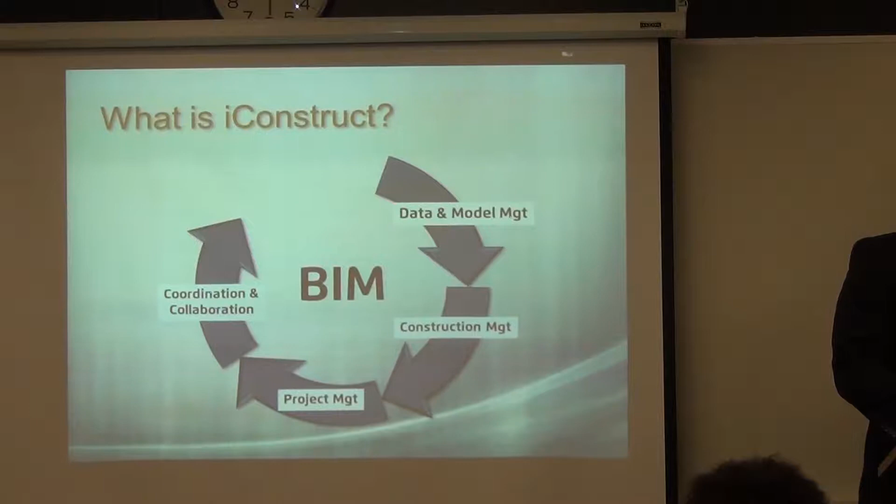So what is iConstruct? You've got the BIM, data model management, construction management, project management, coordination, collaboration, and reporting and communication.

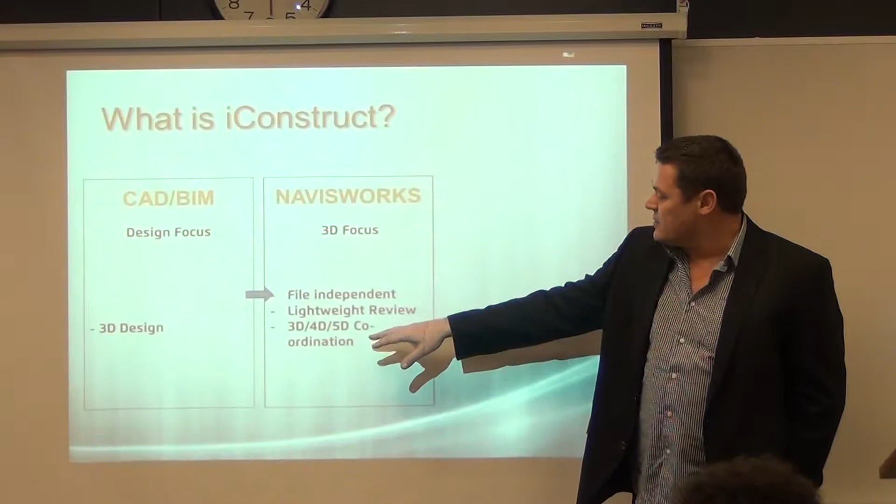So you have your typical CAD stuff, your 3D design. You end up taking that into Navisworks. Now Navisworks is a great tool, but what a lot of people complain about is—it's great to bring in independent files and view all this stuff and do some coordination in it, but you've got so much data inside this model that you can't access. And that's where we come into it.

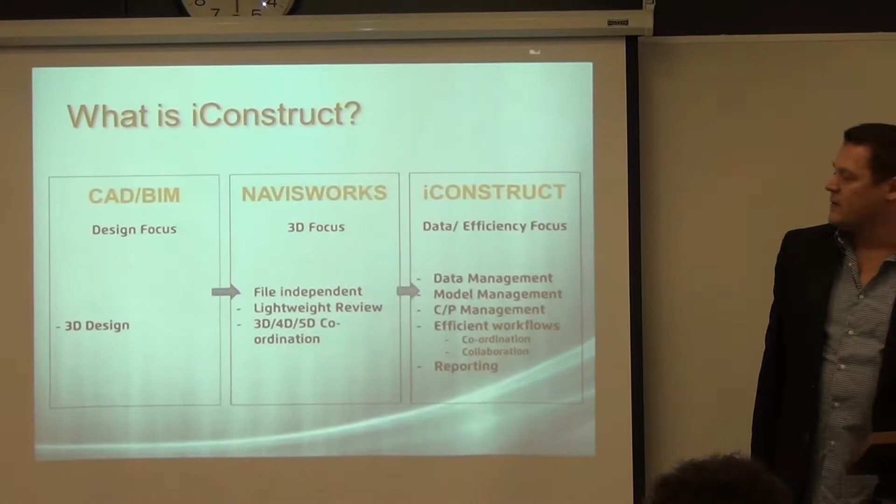With iConstruct, we've got data management, model management. We take your clash detection and put it on steroids, basically. So if anybody's ever used it for clash detection, what I'm about to show you will definitely enhance it.

So what I'm going to do here, and I apologize, this screen is so small right now on mine, so I've got to adjust this thing. And I'm getting old, so I got to put on some glasses.

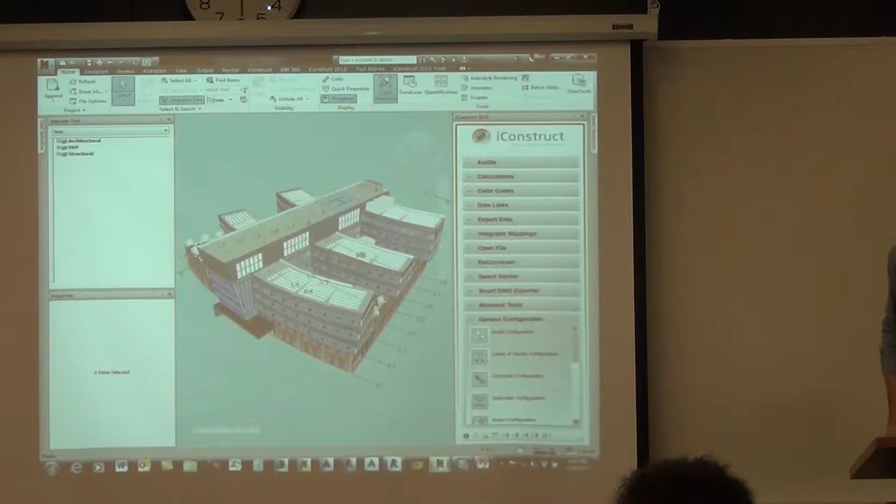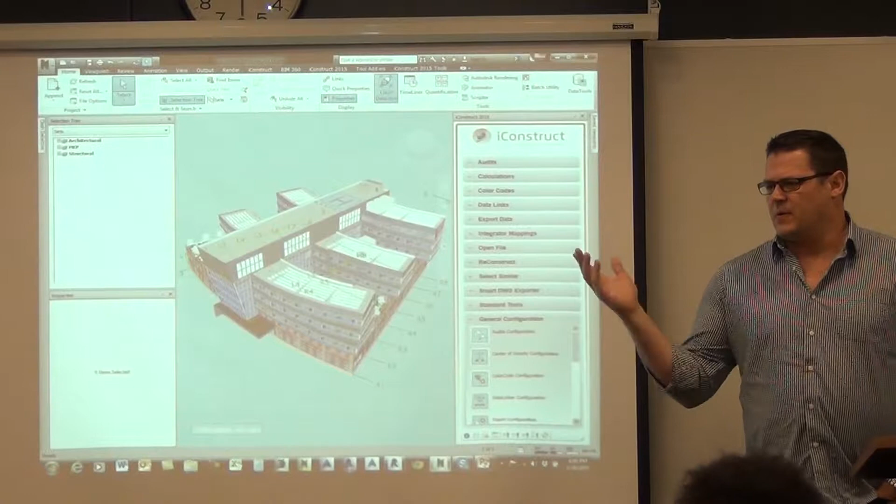All right, so this is Navisworks, and off to the side here, I've got my iConstruct menu. 90% of the people that buy our product, they buy it for clash detection. How many people here are actually using Navisworks? How many are using it for clash detection?

Okay, so like I say, 90% of the people buying it is because of that. So what I'm going to do here is run a quick little test. That's clash detection here—I ran structural versus HVAC. It came up and showed me I've got 432 clashes. That's not a lot, we get clients with tens of thousands of clashes. So that's great, that's all Navisworks, it does a good job of that. But what it doesn't do a great job of is helping you manage those clashes, getting reports out of it, things like that. So that's where we take it over.

So I'm going to come back in here, go to my iConstruct menu, and show you some stuff that just came out last week—you guys are like the first people to ever see this. So I'm going to go to my standard tools, go to Clash Manager, and now my dialog box comes up. It's really huge now.

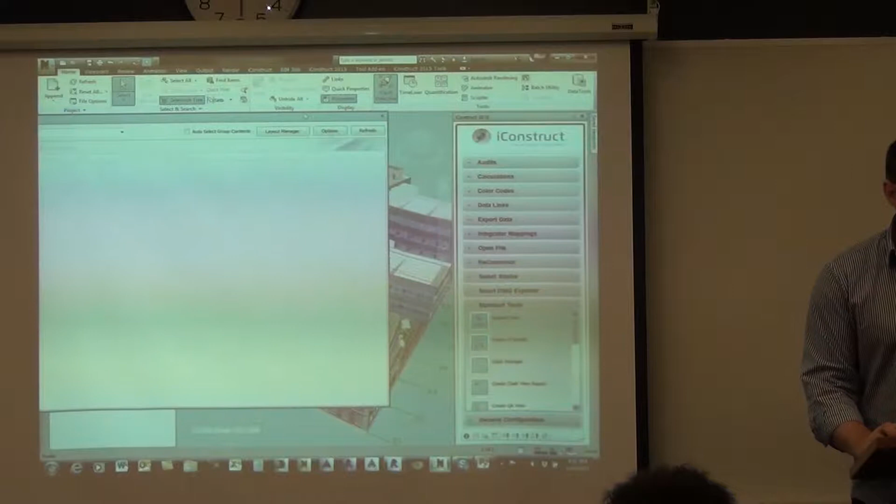The first thing I'm going to do is select the test, structural versus HVAC here. This is going to populate the dialog box with all my clashes. So if I expand this out, you're going to see all my clash names, their status, and if I have any comments.

I have 2 columns here called Clash Instance Count. This is showing me the structural element in this clash is clashing 10 other times, so 11 times in total in the model. The HVAC element in that clash is only 1. So I could actually sort by those if I wanted to, and it's showing me this one's 7.

So I might want to go and sort out the HVAC elements first. We also have severity distance there too if I wanted to sort by that. What I want to look at doing is look at other ways to help me sort or group these.

So if I right click on any column, I can bring up what's called column chooser. This little dialog box comes up here, I'll just stretch it out. So what you're seeing in this dialog box is every single thing right now inside Navisworks that I can use to help me sort or group my clashes.

I want to look at the grid level at all these clashes, which level they're on. So I'm going to take grid level and drop it right there. So now I can see all the levels. This is nice, allows me to see it, but I would rather group them that way.

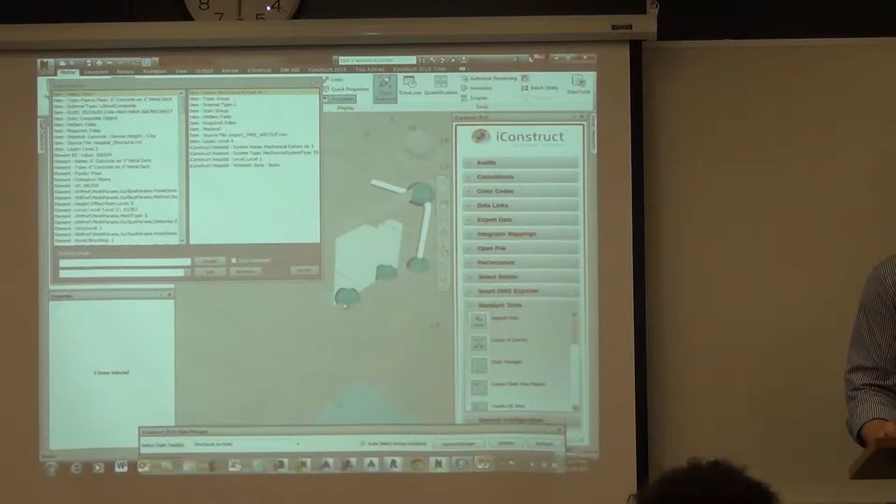So what I could do here is I could say, yep, that one, that one, that one, and that one. I'm going to put it in a group called test group, and I'm going to say auto increment. And so I'm going to go create - they get turned off. I've now created a group and thrown them in there.

Oh, hang on, I missed one here, so all I do is highlight that, grab it from the list, and say add it to that one. And then I can spin around and come over here and say, oh, yep, I'm going to create a group of these over here. Maybe there's somebody else's, so I'll go here, here, just grab a few of them, and I'll just say create, and it automatically, because I have auto increment on, created my group number 2 there.

So now I'm just going to close out of this, bring this back up, my dialog box, and if I minimize that, now you can see I've actually created these 2 extra groups here, test group 1 and test group 2. So like I said, that's just added last week. It's not even in the official release yet, but we do have people that are using it because they love it. So now that I've got that done, I'm going to turn around and pass this back into Navisworks.

Right now this is in iConstruct. So I'm just going to right click on the test here. I can create Excel reports. I can create reports, which I'll show you in a moment. We can also create object viewpoints, test viewpoints, and group viewpoints. So I can create all those right here. We can also renumber these things or rename them.

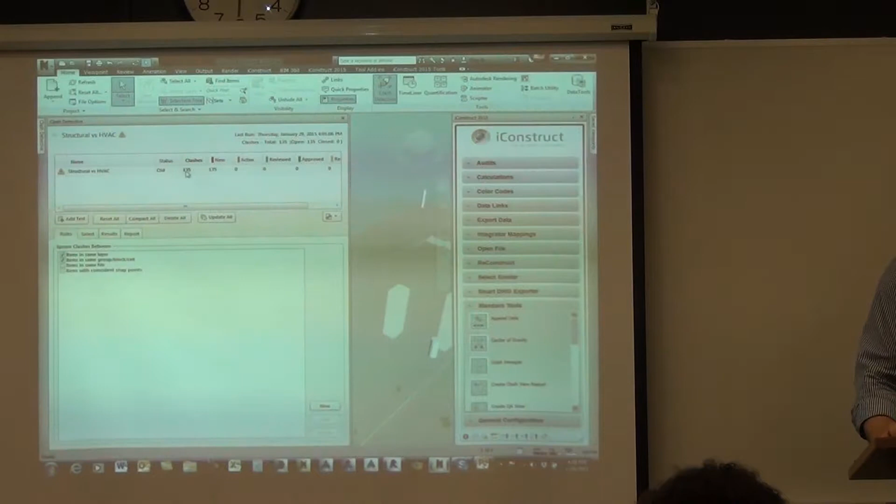What I'm going to do here is go create Clash Detective Group. What this is doing now is passing it back into Navisworks. So before I had 400 and some clashes. If I go back over here now, I'm down to 135 clashes. So if I go to my results, there you can see all the different clashes.

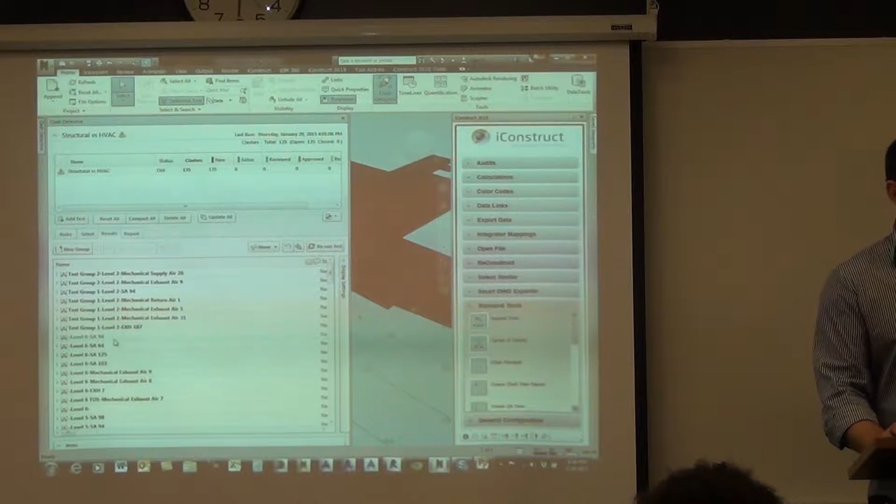So they don't say just clash 1, 2, and 3 anymore - it's actually picking up the name of the groups. So what I'm going to do here is change a few of these statuses just to show you some reports that we can do. So I'm going to go active, reviewed, approved. That's good.

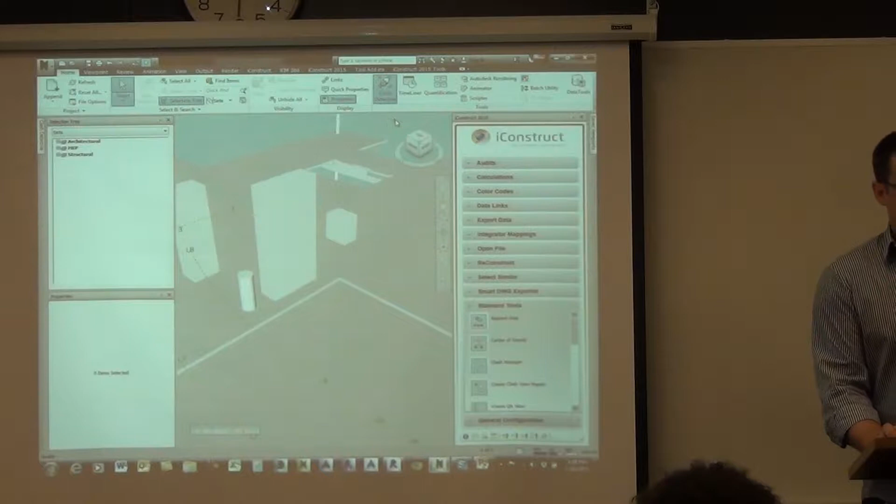All right, so now that I've got that, I want to look at some reports. So I'll expand this out and I'll unhide everything. Come back over here to my standard tools. I'm going to go down here to create Clash View Report. I'm going to expand this out. I'm not going to do them all.

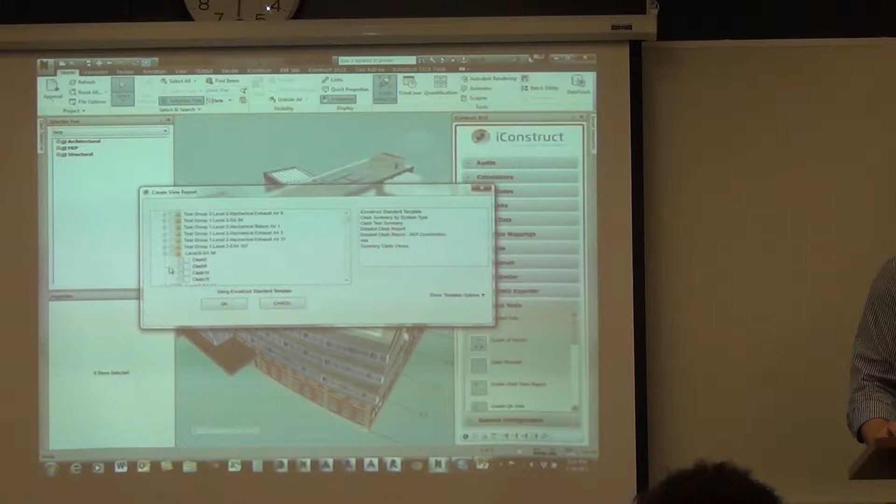There's a lot of them in there. I'll just do this one here. And I'll go Summary Clash Views. So this is going to create a report here. This report is completely customizable. That's one problem people have with Navisworks.

You just get what it gives you. And then they take it into Excel or they do whatever they have to do and they modify it. So in that situation here, I don't know if it looks better on your screen than mine, showing me where the clash is at in elevation, where the clash is at in plan view, and then giving me a detail of the clash itself.

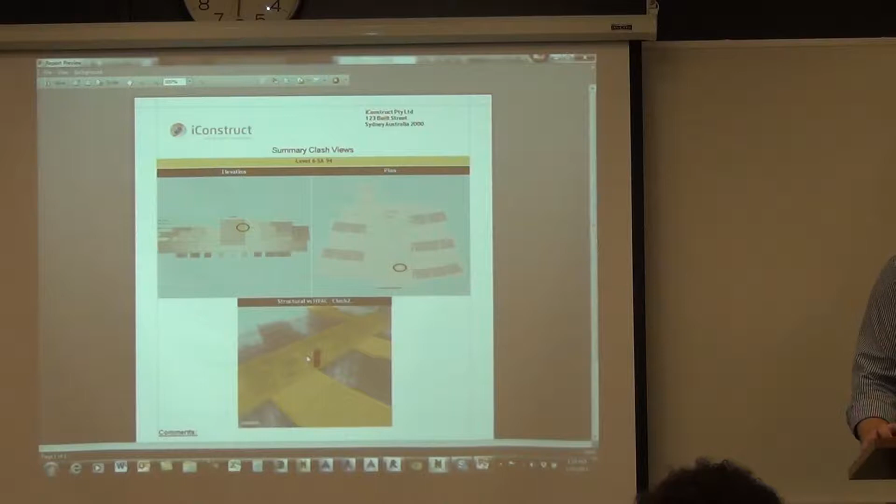We can change any of this stuff. I can take those views off, I can have more views on there, I can make this zoomed in farther, I can put all sorts of text on the side, whatever. We've got our own report engine built into it. It's kind of like Crystal Reports.

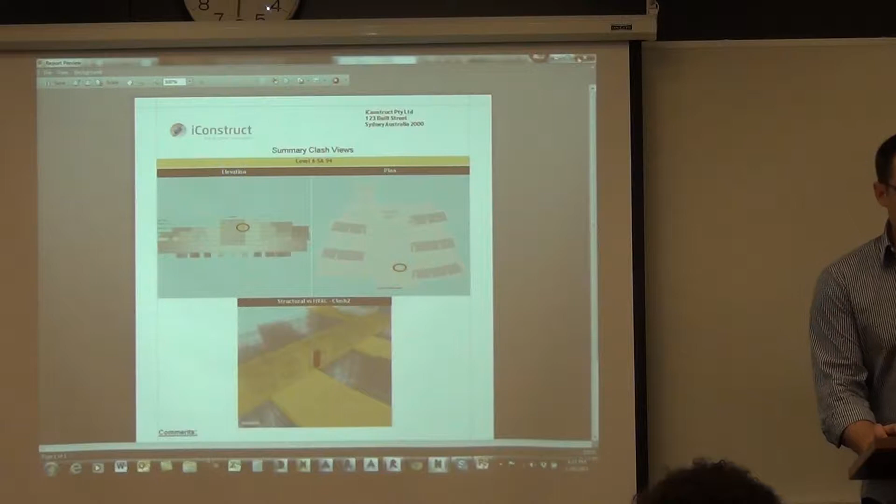So that's one report. I'm going to do another one here. And we'll just grab a few things here.

And I'll go Clash Test Summary. So this is going to show you a pie chart. Now this is really popular at the moment, not so much in this form. This is just showing me how many active or new clashes and stuff like that.

But we've got clients using it to say, show me all clashes over 2 weeks old, show me clashes between 2 weeks and current, and show me all the current clashes. Then they go into a meeting and say, look, we've got 500 clashes over 2 weeks old. And then they bring out the next report: out of those 500, MEP you own 375 of these, structural you own this many. So they can break it down.

We can do bar charts, line charts. We've got a client, actually not far from here, in St. Louis, that's using line charts to show structural versus HVAC, and map that as the job goes on, week by week, just so they can see that line, whether it's dropping or not. So that's the clash detection - like I say, the #1 reason why people are buying this product by far. It's just enhancing what they can currently do with Navisworks.

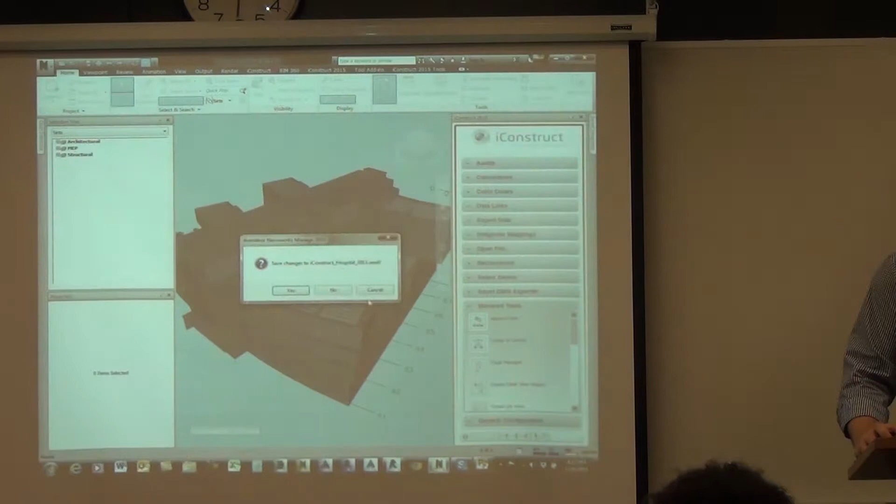So what I'm going to do now is jump into what is called Reconstruct. I'm going to open up a different model here. Often you get files from different sources - you might only be working in Revit, but you're getting files from Tekla or PDMS or whatever it is, and they come in different formats. They look different than your current file, so they're kind of hard to navigate through.

This one is a Tekla file. So you can see here it says not in use, undefined, undefined, undefined. And then you've got truss, and it highlights everything. It's a really difficult file to navigate through. If I expand out truss, then under that I've got angle, and then it says body - what the heck is body? And then you've got to come down here and find out what it is and all that.

So what we have is what's called Reconstruct. I can reconstruct this file - I'm going to reconstruct this Tekla file. I'm just going to give it a name and go save. So what this is doing is exporting this out.

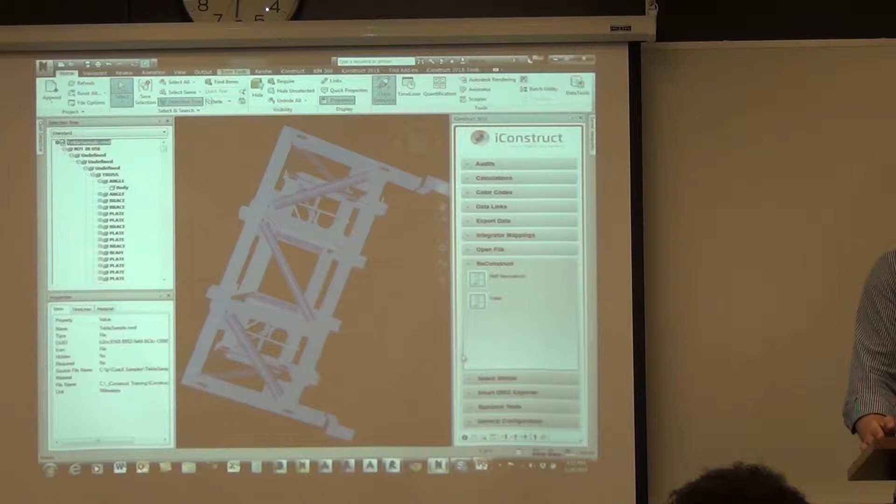It's exporting it out and creating a brand new NWD file. Now, the reason I'm doing it is I want to restructure the tree, but there are other reasons people do it. You might get a large, massive file and want to send it out to you guys in the field, but it's too big to put on an iPad or whatever. So what they do is select certain things and export that out using the Reconstruct tool.

Autodesk is actually one of our clients - they've purchased copies of this to clean up models to go up into Autodesk 360 and stuff like 360 Glue, things like that. So I'm going to open up this file now.

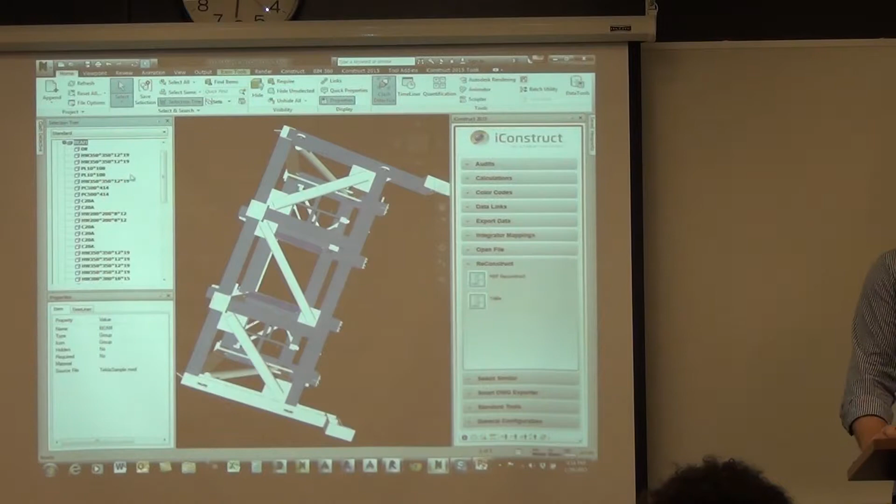Now remember this file format here. If I go over here and open this file, there it is, one I just created, 129. If I open it, the file doesn't look any different. But if I expand this out now, that's the exact same file - all I did was regroup it, saying put all the beams together, put all those braces together, all the plates and the posts. I not only grouped them together, but if I expand it out, I actually gave them a name. Before it just said body, which meant nothing to me.

Now, this still doesn't mean anything to me - I'm not a structural guy - but somebody might be able to look at that now and say, yep, okay, I know what that part is. Otherwise, you're constantly having to go down into these other tabs. All I did was restructure it based off of this tab here - I said group everything by the beam and then give it a name based off of the description.

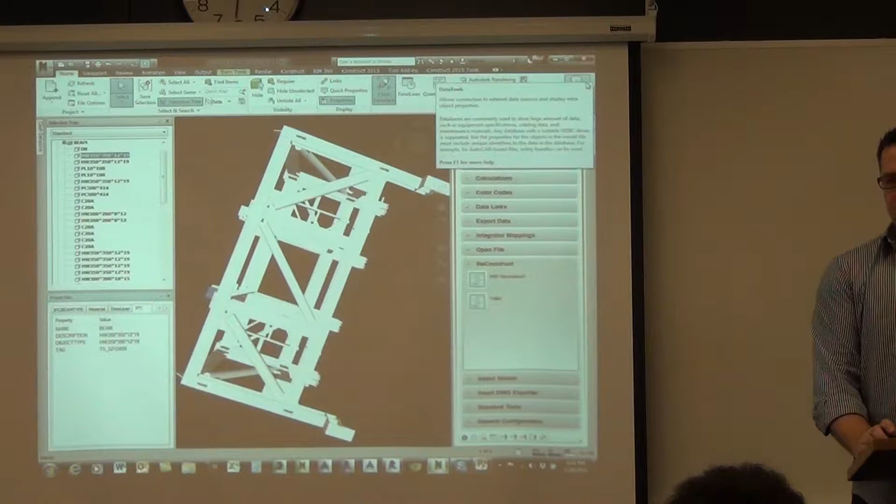But there's other things people use it for. If you get a file like from AutoCAD or something, and it says it's like a pump, and under that it's got solid, line, all this stuff, I can merge all those together into one part. Right now they're broken up into all sorts of different parts.

Okay, next thing I'm going to show you is our Integrator. Reconstruct, not a real sexy tool. Integrator, not either, but they're very integral parts in the product. So if I select this system here at the moment, so that's a system, and it's SA4. Right now I only have two tabs here, Item and Timeliner.

Now if I wanted to go in and do my clash detection right now, I actually want to clash the system itself, not each individual part. I just want to find out, is that system clashing with structural? Right now it would be very difficult to do because there's no information at the system level. If I go down to each individual part, yes, I have that information there, but there's so many tabs down here. Anybody using Navisworks, you see this, often they go to this tab to get some information, then they jump over to another tab.

So what we can do is, what's called Integrator, we can actually create a user-defined tab. I just clicked on my integrator here called HVAC. It says one group and 62 items have been mapped. You look at this right here, it says Item and Timeliner. Once I go OK, you got a new tab now called iConstruct Hospital. We just called it that, you can call it whatever you want. But iConstruct now, if I go to that tab, now I've got the system name, the system type, the level, and the work set at the system level.

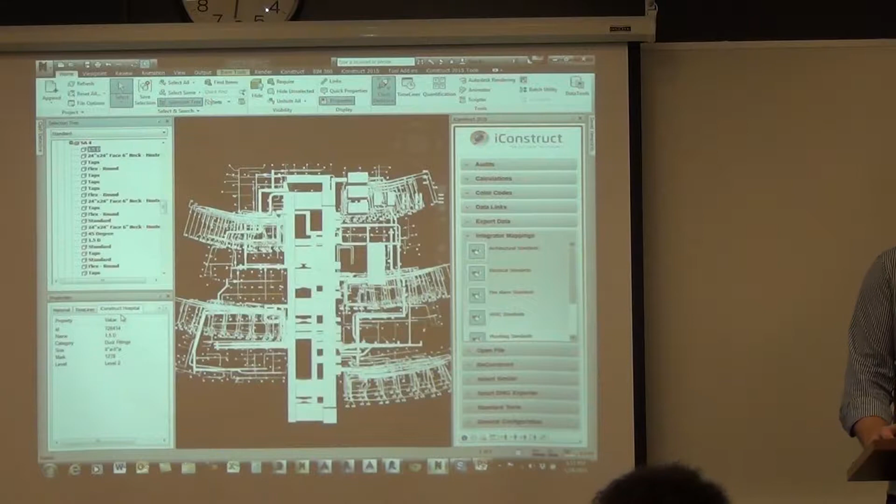Now there's a lot of reasons why you do that. One, it's a lot easier now. I only have to go to one tab to find all the information I need. I can publish this file, send it off to the owner, and I can eliminate all those other tabs and only export out the one tab. So the owner only has to worry about one thing there.

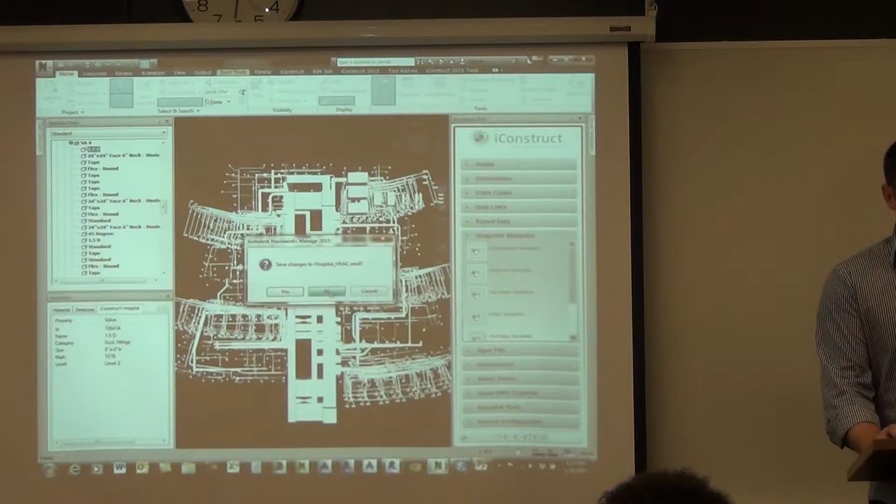But the other big thing, and this is if you're getting into, anybody work with COBie data in here? Not many, huh? So this is just an example anyway, but if I go in here to say some lighting, here's some lights. If I click on one of my lights here, you can see I've got an iConstruct hospital tab, and I got an ID, a name, and a category.

Now what I want to do is attach a database to this. Now you can attach a database inside Navisworks, but it's a live thing that's going on. It goes pretty slow for some clients when they're doing this. What I'm going to do though is take this database, so here I'm going to go data link. I'm just going to attach this database. This is just an Excel spreadsheet. It can be an Access database, it can be a SQL server, whatever.

What I'm doing is looking at a column in that database, and if it matches a property in my model, it's going to attach it. So 1,269 entities have been attached.

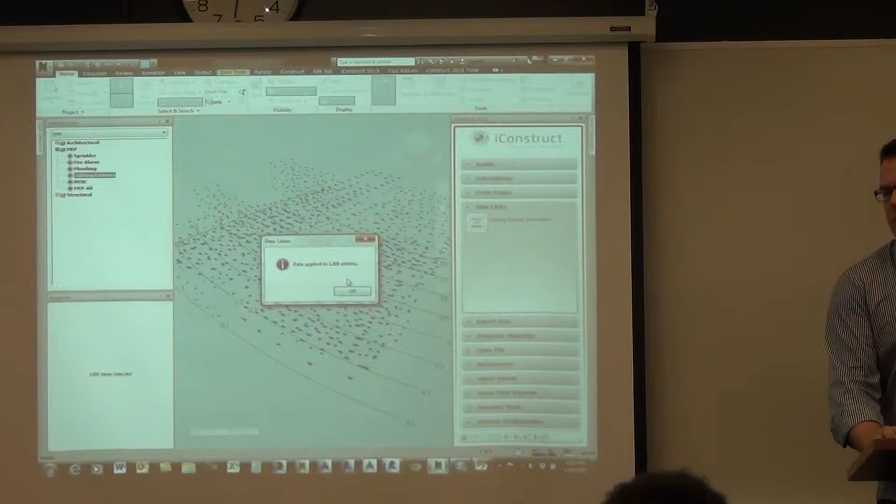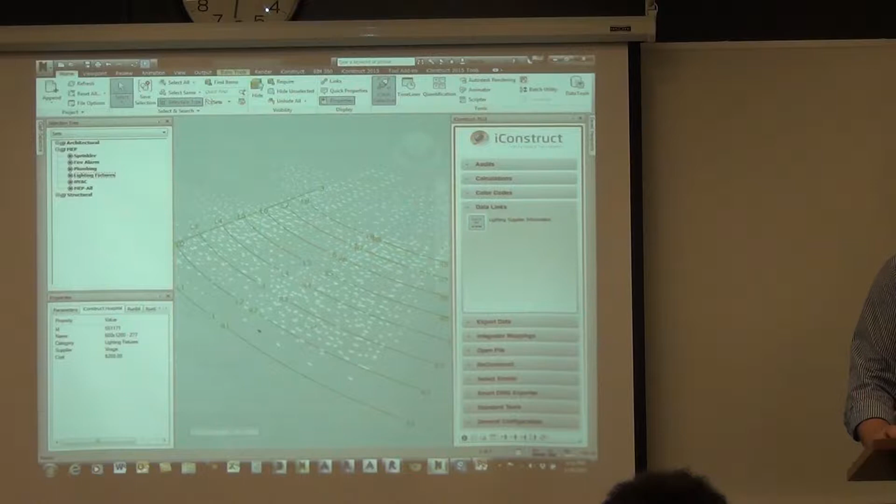Now if I select one of these lights, you'll now see I've got a supplier and a cost. So I physically wrote that data from the database back into my model. So if you're using things like COBie data, or just even writing a work set, say you got work set information, I want to write that back into the model so I can use it for timeliner and stuff like that. That's exactly what we're doing here. That's physically in the model now. So if you open this up in Freedom, you're going to see all this data. So that's the data linking.

Our next thing, I'm going to unhide all, is color coding.

So I've got some structural steel here, and I'm just going to run this color coding. What this is going to do is, same thing like data linking, it's going to look at a database, look at certain properties in that database, and then turn around and recolor my model here.

So there you can see everything that's in red hasn't even been fabricated yet. Orange is fabricated and shipped, and so on. It's just looking at a database, Excel, whatever it is.

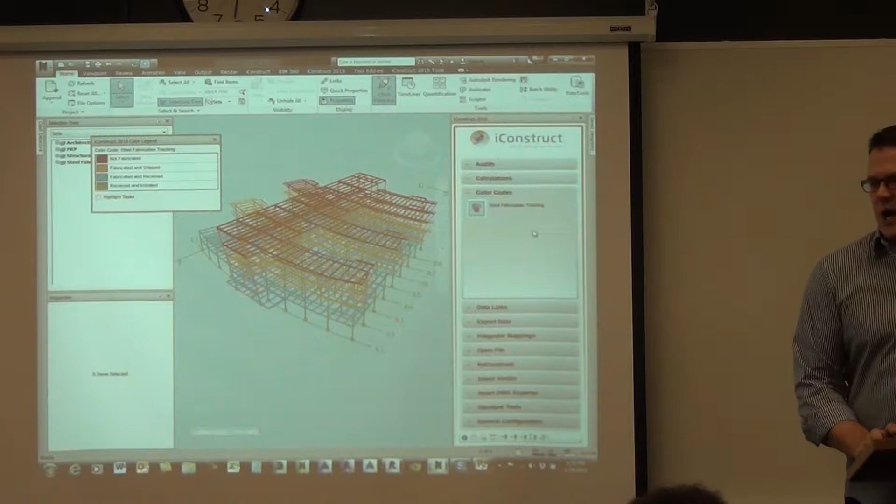We've got clients using this, GCs that say, oh, we've got to place an order for all of our doors on our job, okay we've got 1,000 doors, and they want to make sure they make the order correct. So they'll say, let's color all of our walls in the model based on a fire rating, and let's color all of our doors based on a fire rating. Then they can instantly say, hang on, there's a red wall with a yellow door in there, so they can catch that before they place the order on all these doors. That's another example of why you would use it.

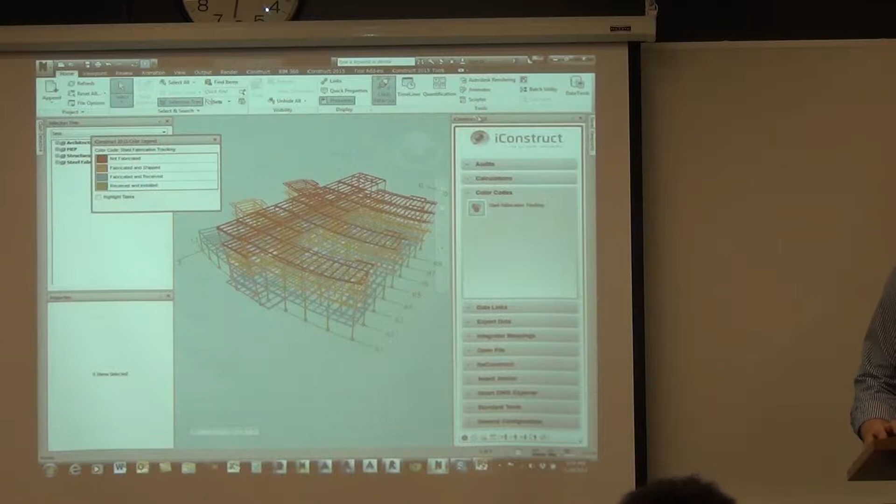There's a lot of tools in here.

Next thing I'm going to show you here is audits. So I want to audit my model. I've got a bunch of HVAC here, and I'm just going to select a bunch of stuff.

I'm going to come up here to audits, and what I'm going to do is say I want to isolate all the system names. So I'll click on this, and what it's doing is grabbing all those parts I selected, and if it finds a certain property that matches another property in some other part, it's going to create a viewpoint of all those parts. This is going to take a few seconds, but you'll see why in a moment.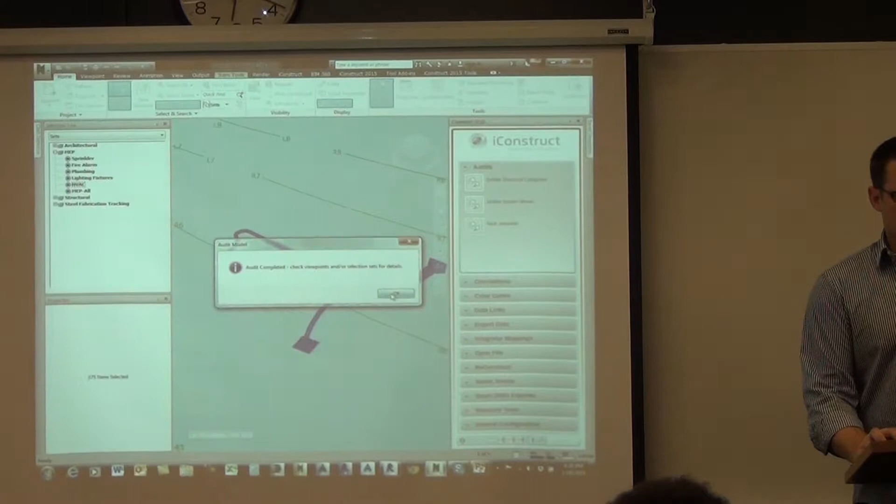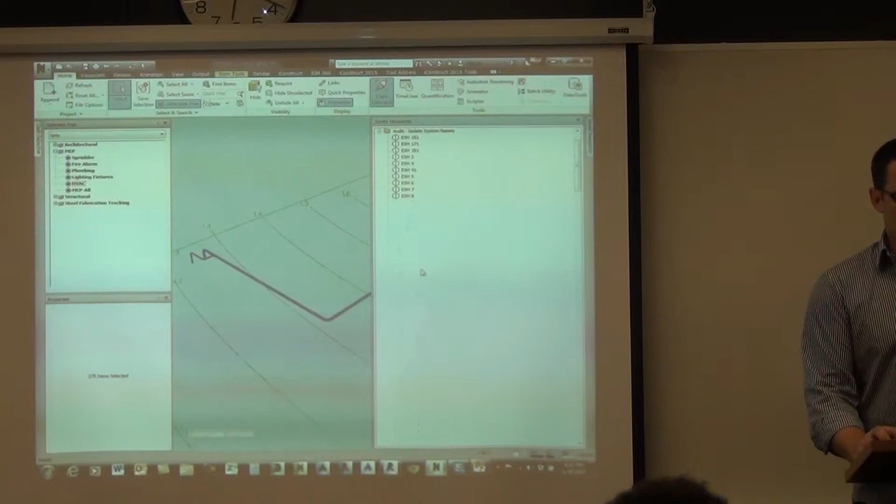So there's my one viewpoint. If I come over here to saved viewpoints, and go under audit, you can see all the different viewpoints that I've created. Some have only got one part in it, and you can see there's a lot of viewpoints.

If I come down here, I'm going to grab this one. So I can see this part here, this system is missing a couple elbows. Let me slide that over a little bit. So it's missing some elbows there.

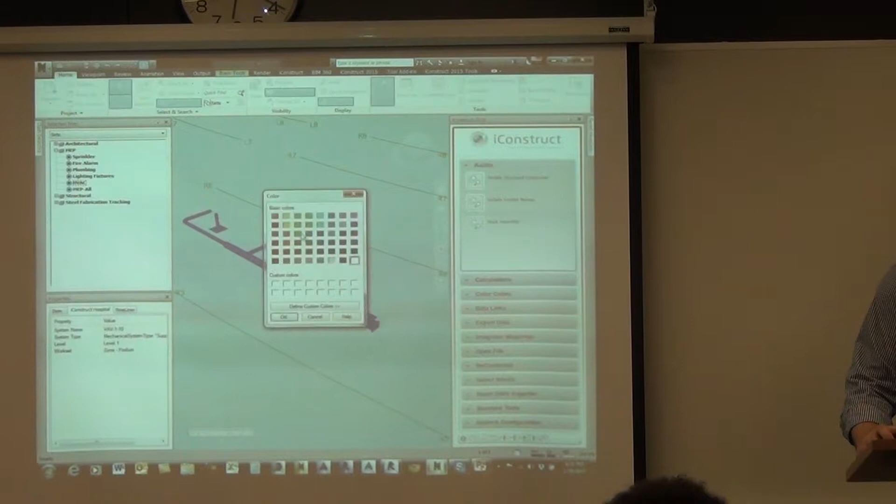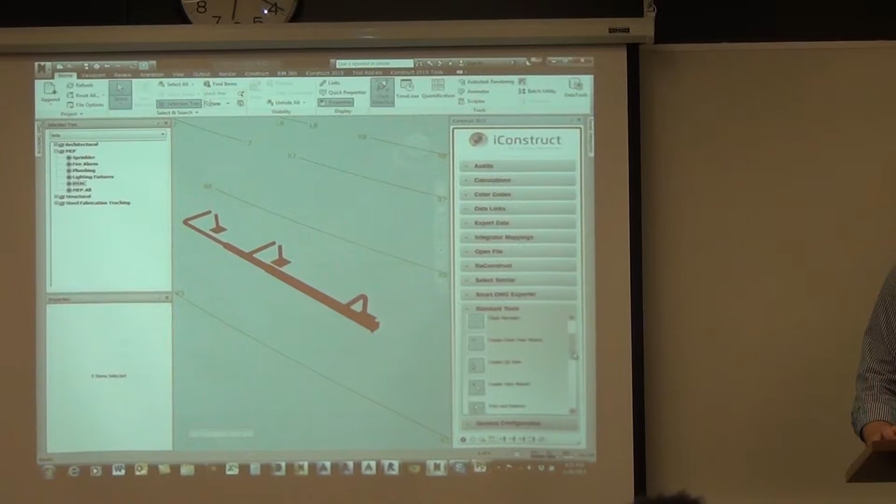So what I want to do is get a report out of this. I'm just going to quickly change the color of this. Okay, so I've changed the color, now I want to do a report. I've come back down to my standard tools, and I'm going to go create view report. It's not a clash view, it's just a view, any kind of view you have. I'm going to find this one I have, 110, where I changed the color.

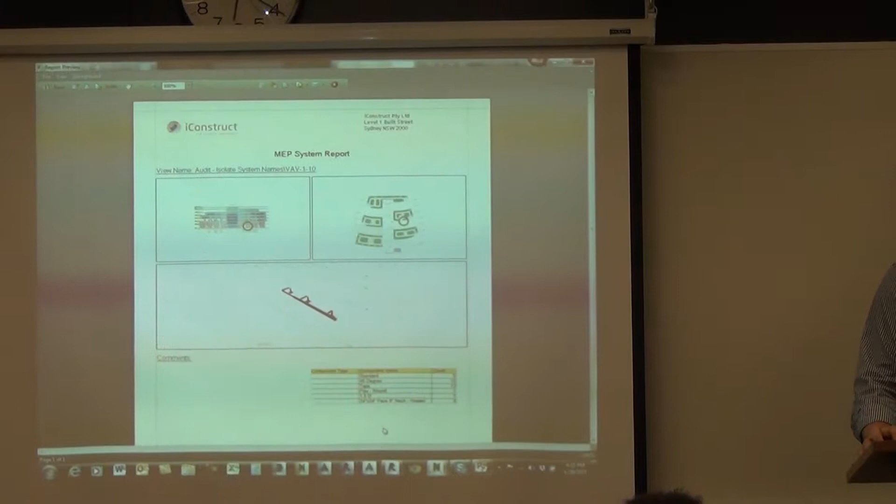And I'm going to select MEP System Report. This is going to be a report similar to a clash view report, so you can still see where the clash is at in elevation, where it's at in plan view, but also it's going to give me a detail of the system, and then quantities of whatever makes up that system. So if I had pipes in there, I can get pipe lengths. It's all based off of the view, we read all the data that's actually inside that view, and we can get that information.

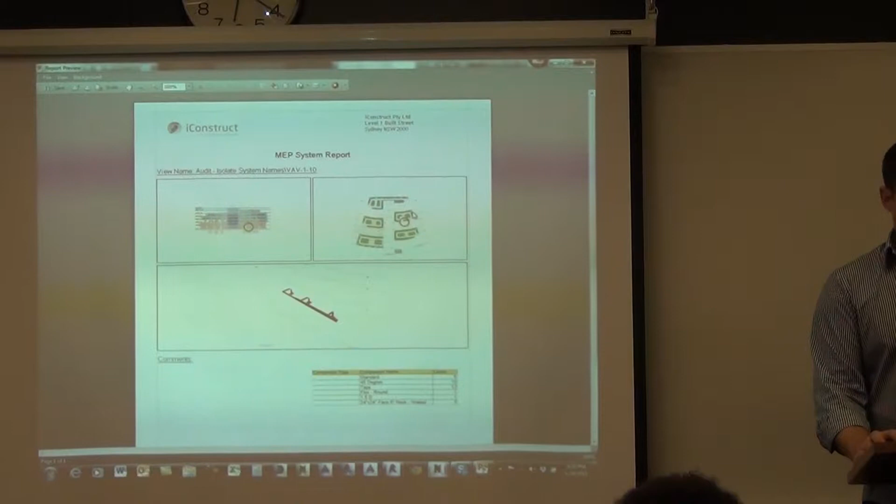We've recently got a very large electrical contractor here in the U.S. that's purchased this, and we did some modifications for them to be able to show side view and top view for like an assembly, if you're going to send it off to manufacturing, so they can get all the parts in. We've actually just added a way to dimension it in here inside Navisworks, so they can basically generate these reports and send it off to be constructed.

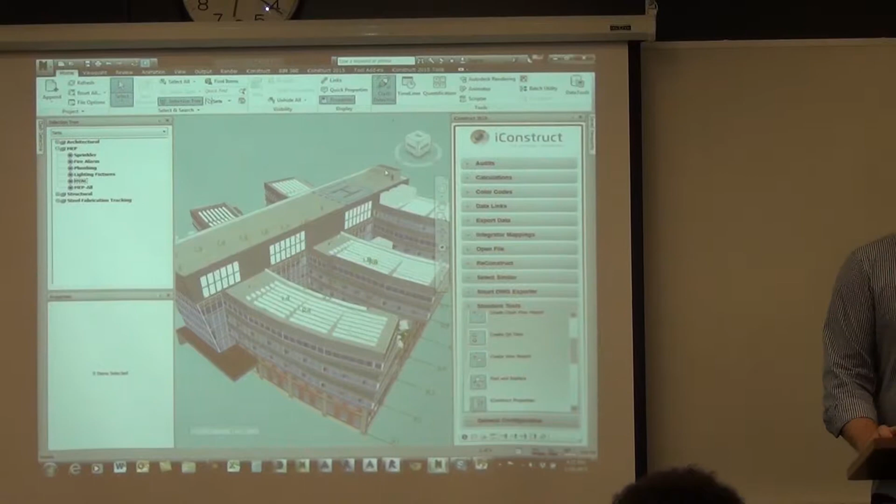Okay, the next thing we've got in here is exporting some data. So I'm going to just hide some stuff here, a whole bunch of doors. I'm just going to go up here to export data, and I've got one set up called door schedule report.

So I export this out, it's just going to create a PDF file for me. But right there you can see what it's done is broken down by the level, the type of door, the family, and then how many on each floor.

We have clients that are buying this strictly just for this, just being able to say, okay, I've got a bunch of duct, I want to know how much, what's the length of 6-inch duct that I have, how many 6-inch elbows do I have, and so on. Just basically taking Navisworks, grabbing anything on screen and hitting the button, and it'll generate your report.

Okay, like I say, this is customizable. This is only, and I'm going to show you what you would get actually out of the box.

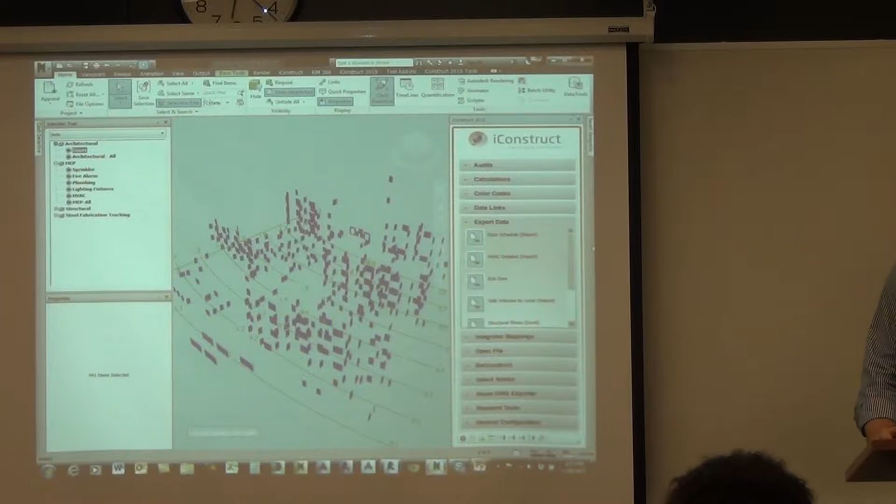A couple other things we've recently added in the past year or so, and as far as we know we're the only ones out there that can really do it: we can now create a DWG out of Navisworks. So we can export anything inside Navisworks, whether it came from Tekla or any other product, and turn around and export that out as a DWG so you can take it into other software. Also, the hottest thing right now other than our clash detection is the IFC exporter. Everybody for some reason wants an IFC file, so we can now take anything out of Navisworks and export it as an IFC.

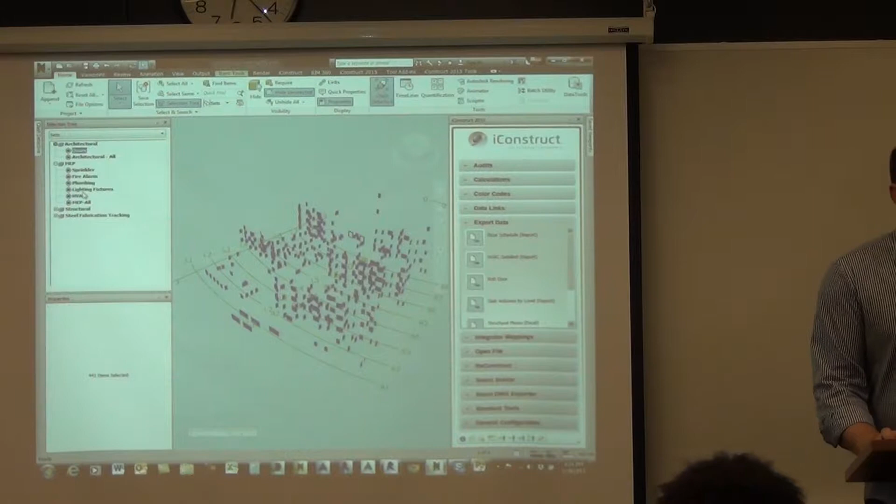So if I just come down here, I'm going to show you what we've actually done. Let's turn on a couple things in here. First of all, I'm going to show you the DWG.

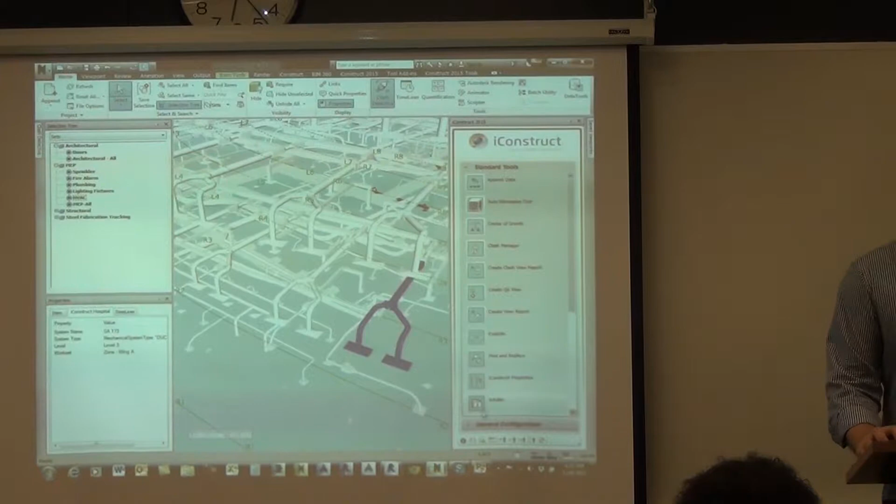We can take any part - I'm not going to export it out, I'll just show you here. I can select the part, and come down to General Configuration. This is where you set things up. Let me quickly clear my profile - this is what you get out of the box. Anybody who buys iConstruct only gets standard tools and General Configuration. So often people think they got ripped off after watching my demo, like where's all that other stuff you showed me? It's right under here, General Configuration, because all that other stuff I was using was unique to my data set or my company, and you might want to change it to be unique to yours.

So for instance, I'm going to create a DWG export. I'll come down here to Smart DWG and give this a name - I'll call it DWG Export. I can choose whether I'm exporting out a mesh or a solid, so I'll say let's do a solid, and whether it's imperial or metric - imperial. Then down here at the bottom, do you want to keep the data or only the user data? If I say keep data, that's everything inside Navisworks, a lot of information. Keep user data is my unique tab that I created - I only threw on the stuff I wanted, that's all I want to export also. So I'll say keep user data, and I can say keep groups, and specify a layer too.

I'm just going to save here and go close. Now you see here we've got Smart DWG. I missed something I didn't tell you about - one thing here, I didn't want that one, I always do that too, it goes so quick. I'm going to load this. I don't want to export out everything that's visible on the screen, I only want to export the stuff I've selected - that's all I want to do. So I'll hit save, yes, and close. Now there's my Smart DWG, and I'll go up here and go DWG Export. It's going to ask me where I want to put it, I'll go save, and it's going to export this out.

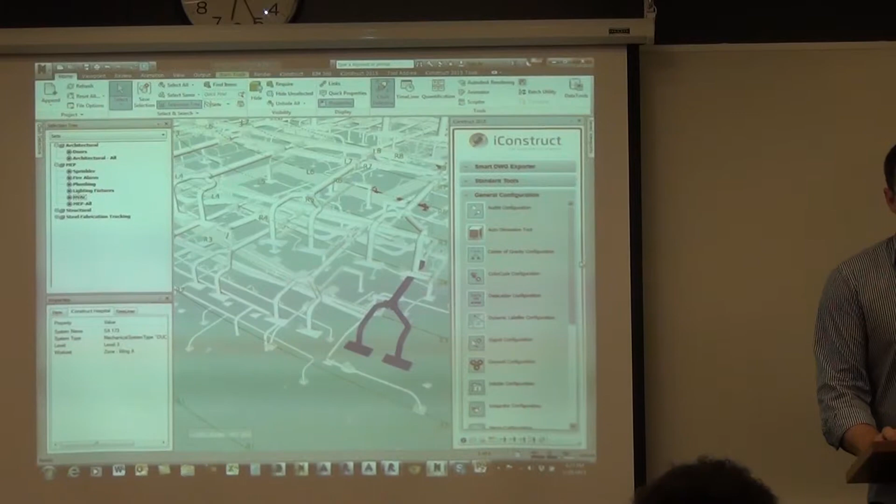So the last one I want to show you in regards to exporting is our Smart IFC. This is huge at the moment - I don't know why, but everybody's starting to want IFC files. Basically, I just create a new file here. Let's go here - and actually, this probably... there it goes. So I gave it a new one, what I could do is refresh this.

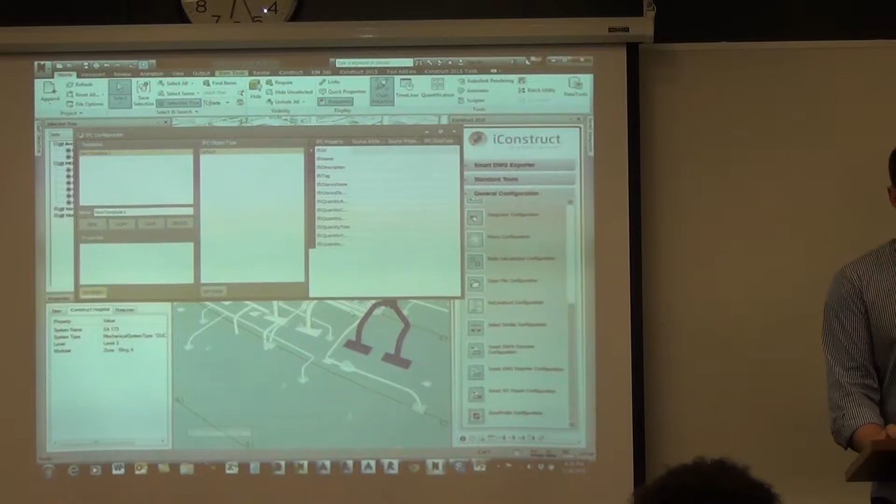Okay, so basically I can take any of the properties. I have the iConstruct Hospital tab, and I want to take all those properties across with the IFC file, so I can just drag those into there. That's going to take across all the iConstruct Hospital stuff. The link here actually represents the IFC quantity link, or whatever it is, so we can drag and drop any of that stuff.

Last thing here is the options. We've got all the property, all the IFC components - we built the whole schema into the model. So if you're going to export out a pipe, here's a pipe - you can set up a selection set or search set and say this means it's a pipe, or an elbow, or a pipe fitting, or a pipe segment - rigid or flexible. You just map them to this thing, use a search set, and it automatically exports out as an IFC file.

I just hit save here, and when I get out of this dialog box, now I've got Smart IFC. That one isn't officially released yet - we had to buy some third-party component to help us get where we wanted to go, so we're just working out the contract with them. But we've got clients using it, we're just not officially selling it yet.

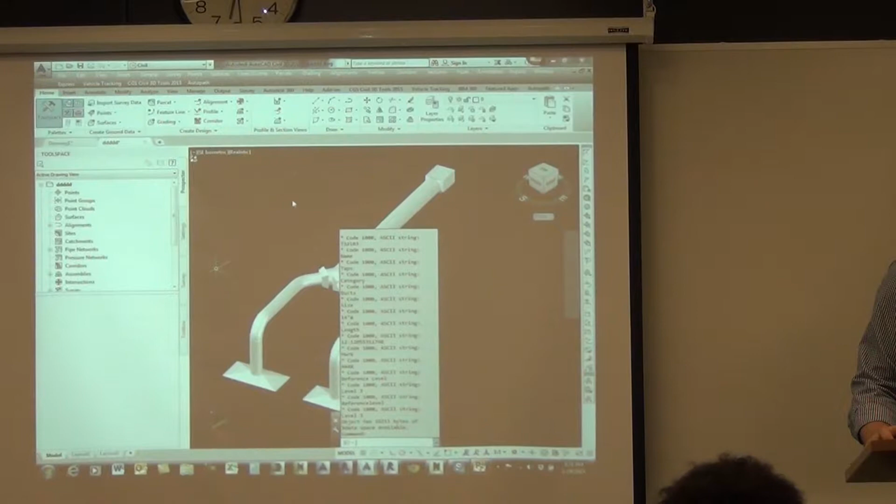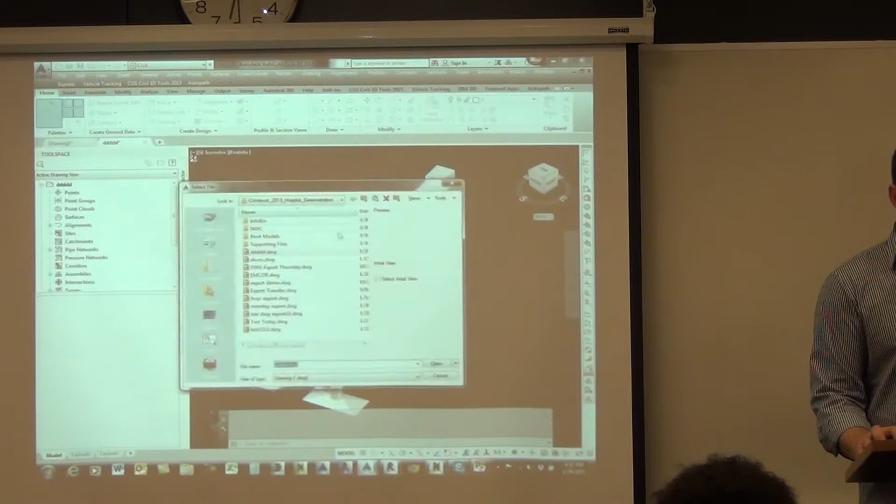Okay, and can I take a look at the layering? I didn't actually layer that one - I mean, is it all in one layer? It is, but you don't have to have it in one layer, I just exported it out. It's probably all as layer 0 probably, yeah, but I have the ability - I probably have another one there that I exported out. Let's see if this one has got one that I've done. It doesn't look like it.

But inside, back into here, all I needed to do was say, let me just change this - okay. And so I want to actually call it maybe the name on there. So if I come back down to their Smart DWG, and I'm going to say what I want to use here is iConstruct Hospital, and I want to use the name on that. What will happen is every time it finds that, it's going to create a layer for that, or I could use some other property if I wanted to. Very good, yeah, great, there you go, close.

Robert, can you talk about the sphere going back into Revit? So it'll be through IFC - basically we bring it in, and then it'll be an entity that you can export out as an IFC and go straight into Revit. And the IFC properties all go - it takes all that information with it.

Will it come in with the different colors based on the new clash, the existing clash? It doesn't, but my guys are that good - they literally wrote that overnight. We had one client that says they want to buy it, but we still kind of go around and do this - we threw it together real quick. He came back to us and added the add and remove, because he's saying, you know, I'm calling the darn thing group, and it keeps adding it all to the same one.

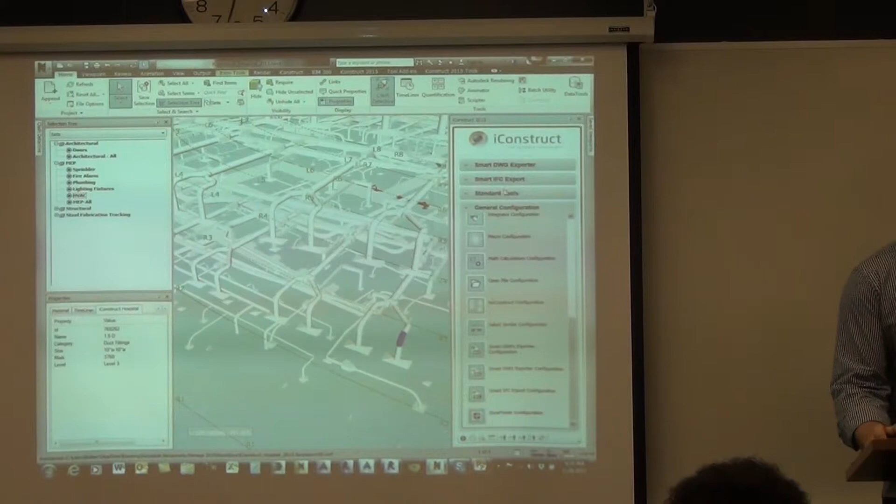So questions, I've got other stuff to show you after this, but questions, anything on what I've shown? Other things I can't really show you because it's so new and I'm not very good at it. This one, you guys can't even hardly read that.

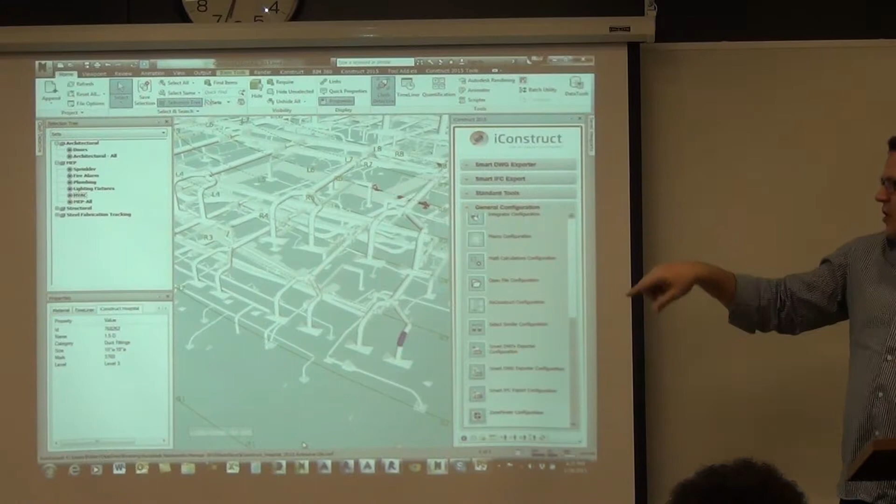Zone Finder. So we got a Zone Finder configuration in there. What that does is basically you can set up zones. You could take an AutoCAD polyline or an AutoCAD drawing, and we can take that data in here and set them up as zones, so you might say that's zone 1, 2, 3, 4. Then we attach that zone information to every single part that falls inside that, so you can use that for TimeLiner and stuff like that. It's basically taking an AutoCAD entity, or we could draw it around there, and giving it a name, might be a work set or something like that. Then we attach a new property to every entity that lies inside that. If it lies within two ranges, it attaches a property for both ranges, so it says hey, this pipe, the majority of it's in zone 1, but part of it's in zone 2, so a new property is added, a partial property, zone 2. Okay, so that's Zone Finder.

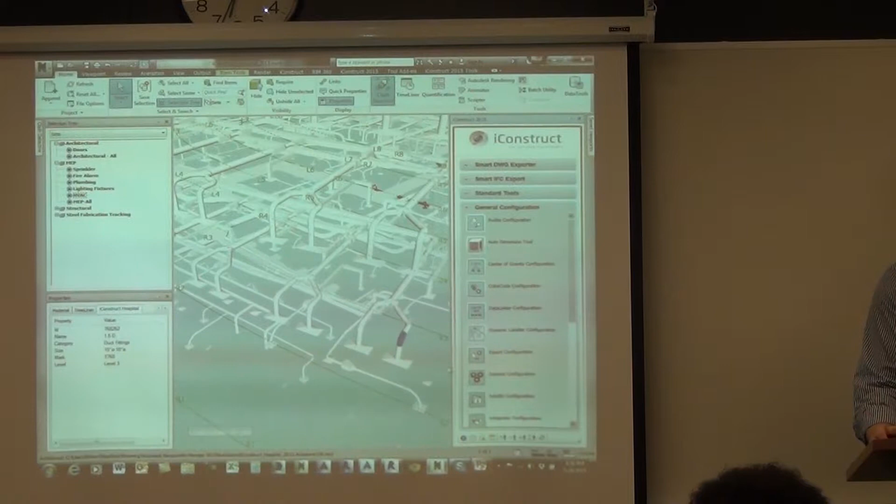We have ways to be able to label things. Like I said, we've got this new auto dimension thing coming out too, it's not really auto, I don't like the word auto in there. You pick two places where you want the dimension to go. The benefit of that, why we've done it for this electrical contractor, is it creates an external file with the dimensions. So we go in there and dimension it up, and then you basically get rid of the dimensions, but there's a file there. So then when you create your viewports or viewpoints and generate your reports, the dimensions come into the reports, because it's looking at an external file, and it will automatically draw those dimensions in your report.

All right, so questions on anything like that? I've got other stuff to show you after this on something else, but yeah.

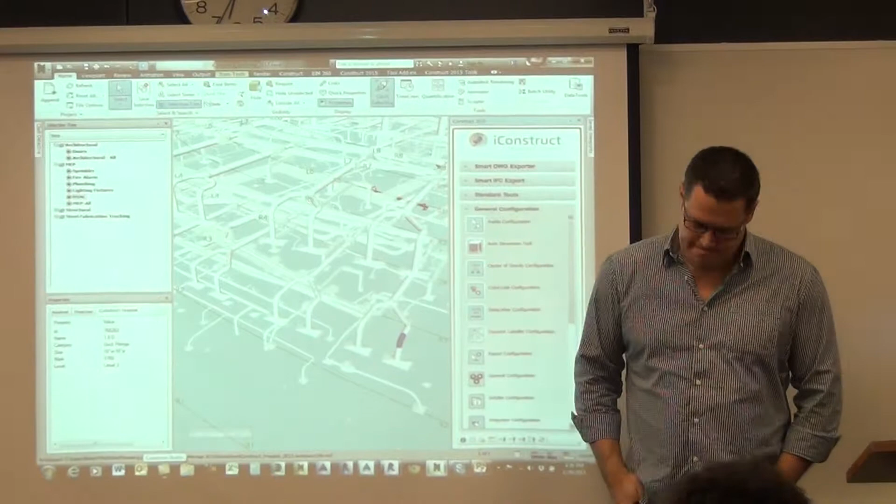On room awareness, it's always been a frustrating thing to find out what room you're in when you're walking around, do you have anything that enhances that? That's kind of what we're going to be doing with the Zone Finder, because that's one thing they're saying, it's like, hang on a second, if you've got a room, like a floor or whatever, other stuff, we can attach that property to every single thing that's inside that area.

Okay, so that's the idea with the zone finder. You walk around your property and say what room I'm in. If your zones are set up as rooms, since we're looking at taking stuff out of Revit, if you've got a Revit room, we can take that in and say those are all different zones, and attach that room property to everything that lies within that room. That's what Zone Finder will eventually do.

Whatever changes you guys make, will it be like an update or after? We have a subscription just like Autodesk does. A standalone price is $3,000, a network copy is $4,000, and the subscription is $750 a year.

We come out with two releases a year, but then we also come out with what we call point releases with new features like this. The reason we call them point releases is we have no documentation yet - we're just building them quickly for a client. It's ready if anybody wants to use it, but there's no help file, no videos, nothing like that. It's there, but we're not advertising it until it actually goes into a full release.

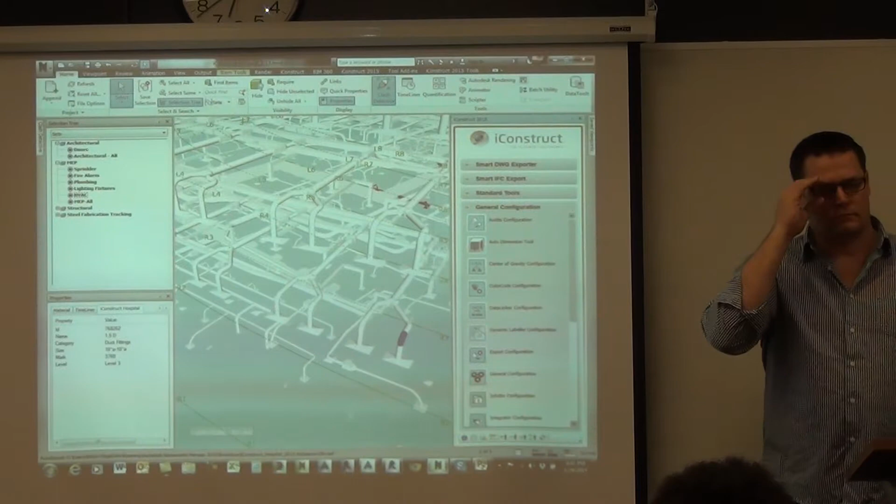So, based on what I'm hearing, if we would like to expose other people to this, we could become a reseller? Well, we've got a few official resellers. I had a client in Minnesota, typically resellers have done it and said, okay, they want to buy through their reseller. You like that one point of contact rather than having to go out here and deal with it all. So if you really had a reseller you'd like to deal with, by all means, they could source it through me. I'm the main guy for it here in the States, so we can give them a commission and they sell it to you.

So what we should do is lead them to you, and then you would fall under their side of the boundaries as a reseller. Yeah, okay. I'm always looking for resellers.

But the biggest thing is, I worked for resale, I owned a resellership for many years. Our biggest issue is that resellers, typically the Autodesk resellers, have so much pressure on them from Autodesk to do stuff. So we have a difficult time unless they dedicate one person saying you're the head of this product. It's difficult for us to get much out of them. So we sell a lot more direct to clients because the resellers haven't put people on saying, yep, you're the main guy on this.

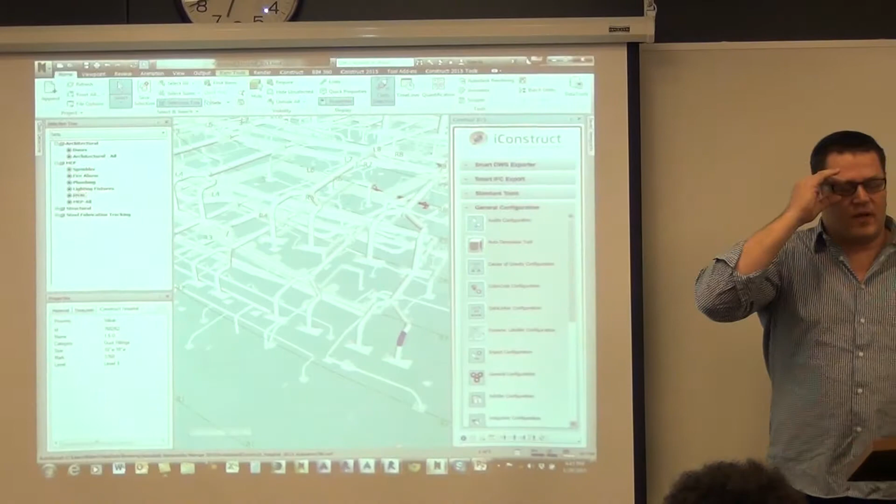This iConstruct works for DWG and Revit, those Autodesk products. And does iConstruct work for Bentley products also? We can't export out a Bentley product, but you can bring Bentley into Navisworks, and we can export out a Bentley DGN or whatever it might be.

In Navisworks you can now import PDF files, sheets from the construction set. Can you pull information from those? Not right now. We may look at something like that.

Probably our biggest concentration is Autodesk. Everything's going to the cloud, point clouds and stuff like that. We don't do anything on that at the moment. Autodesk is kind of putting pressure on us to do something, because a lot of people using our tools, they want those people up on their product, up on the web. So I talk to my guys, and if they think that'd be pretty simple to do, like we could create a PDF out of this, but we think, why should we do it?

You've got Bluebeam out there. Oh yeah, no, I wouldn't be concerned with that. I'd be more like picking quantities out of the model, stuff that's maybe just detailed on the drawings and not in the model.

Yeah, we could discuss it. We just try to work hand in hand with Autodesk at the same time, so we don't want to do something they're already doing. They do talk to us about what we're doing, so there's no overlap. We don't want to reinvent the wheel if they're already doing it.

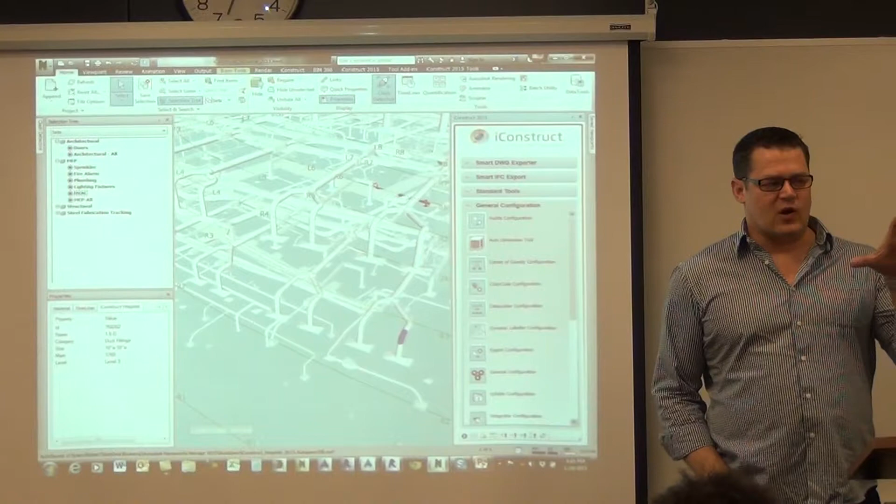Hey Rob, in Navisworks 2015 you can open 2D PDF files. Yeah, he's wanting to try to get the quantities out of it, kind of like the quantification tool, where you can take a drawing and go over that. I know what you're talking about, but at this point, no.

Anybody, other questions? Jason, Jim? I got one.

Oh, it was virtual environment. Have you had any success putting this on a virtual platform where a company could access it?

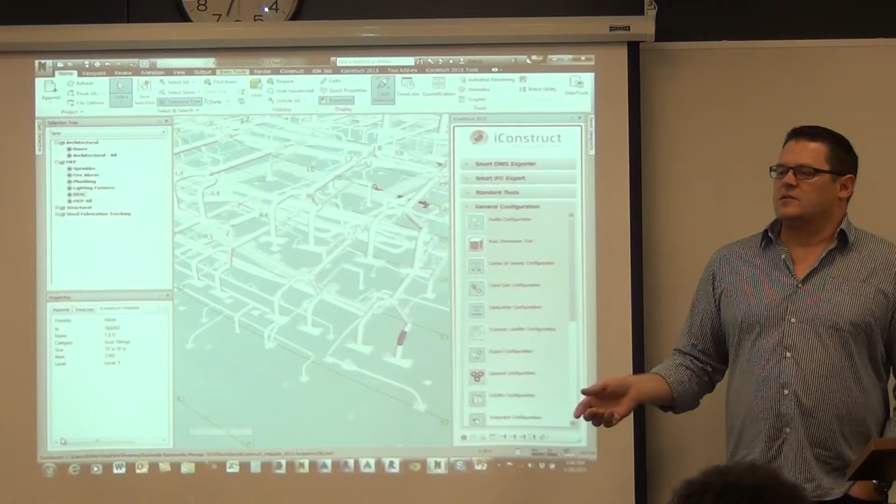I'm going to say no, but it's more so our licensing. I had an issue with a client just last week, he kept getting an error saying something about virtual environment. My guy said he's trying to license it on a virtual environment, you can't do that. I went back and told him you can't license it on a virtual environment, but you should be able to use it on one. So then he said that still doesn't work, so I didn't know what was going on.

Well, he was actually using a Mac, and that was it. My guys actually generated him a license that would work in the virtual environment. So I'm not saying we can, because I don't really know what they did, but the guy came back and said it's all working great now. I don't know much about virtual environments, so I don't know if what we did for that machine is the same.

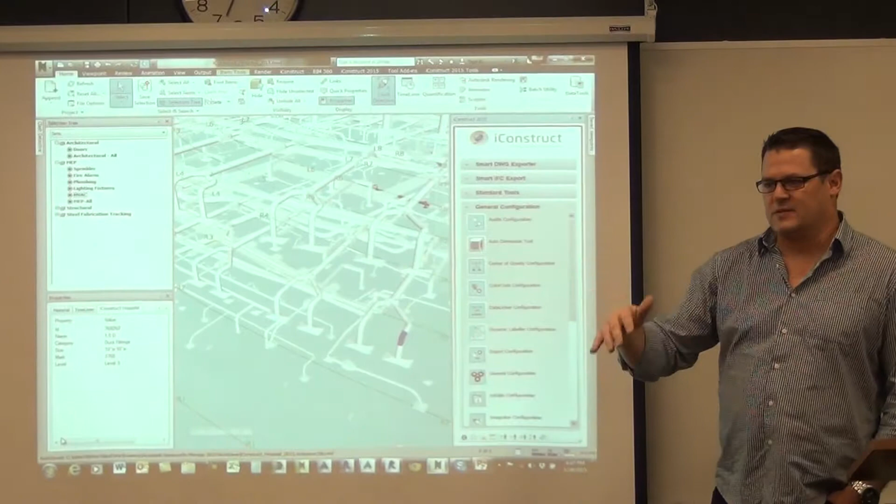We do that - our guys down there have a BIM division that actually does BIM work in real life, not just developing software. They're writing in properties from a database, like a work set, so they can use it in Timeliner and all that. That's the difference between what the Navisworks data linking does and ours. The Navisworks one, you're kind of going back and looking at the database, you're not physically writing it into the model like we are.

I work on two sides of the fence, either design teams or construction teams. Who's picking this up more, the construction side or the design side? I would say more the construction side, but not by a wide margin or anything like that.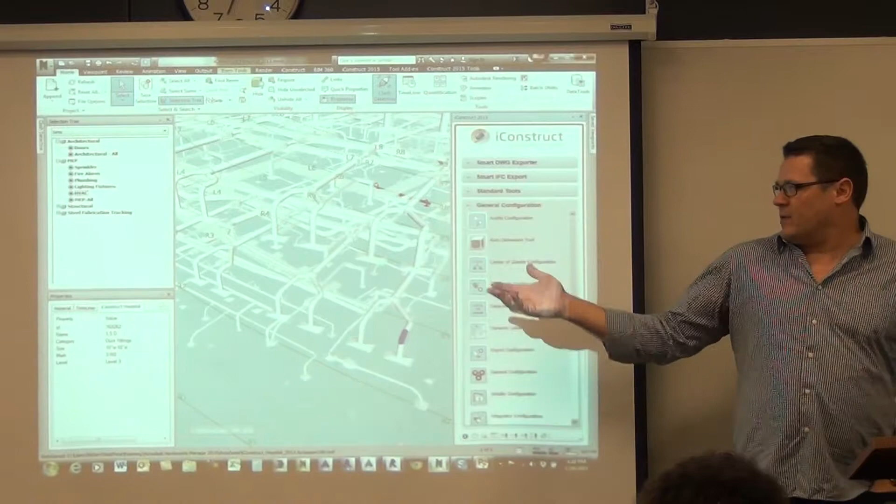Basically anybody that's using Navisworks, they got it for clash detection. Anybody using clash detection, boom, they look at buying it. But then once they got it, they realize, shoot, I can get reports out of this, I can get quantities out of this.

Here locally, the typical deliverable is going to be a PDF. You hope to get a 2D CAD file, and it's hard to get the 3D Revit files. So I'd venture to say locally it'd probably be the construction side. Yeah, I can see a lot of value to that.

Oh yeah, that's like the DWG when it came out. Clients would call us saying, 'Man, you're sitting on a gold mine.' It's like, really? Is it that big of a deal? It is that big of a deal, because we get the data, but we want to take it back into CAD and maybe dimension it up or do something else with it, but we don't have the actual data we can take back into CAD. They've given us an NWD or whatever - I can't do much with that.

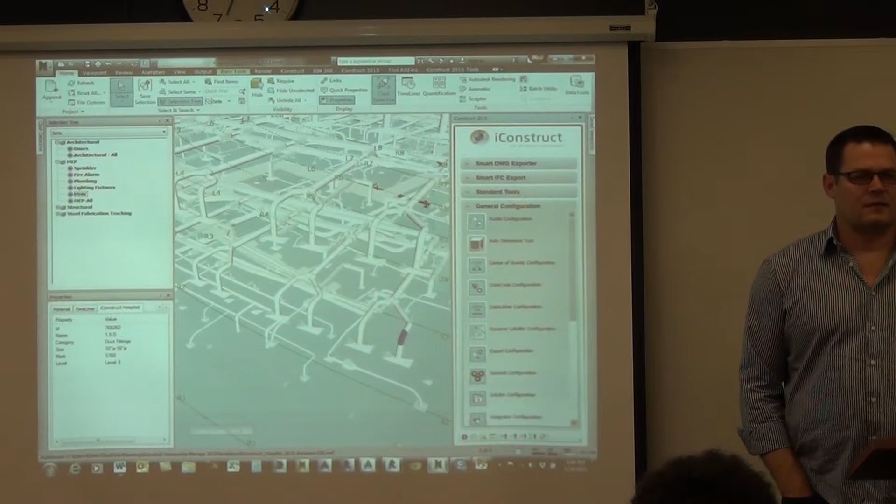That's one of my biggest complaints. I go to all these meetings as a BIM manager for construction, but when I get to the table, people want to deliver NWD or NWC files because they're so light. But the guy at the end of the table, who's a fire sprinkler contractor, cannot do an XREF with that, and he doesn't have full-blown Navis. They don't understand the full workflow - if you can do an XREF, you can work around and get these solutions quicker. You give me an NWD, I'm dead in the water.

Yeah, so I see the tremendous value of that.

Any other questions?

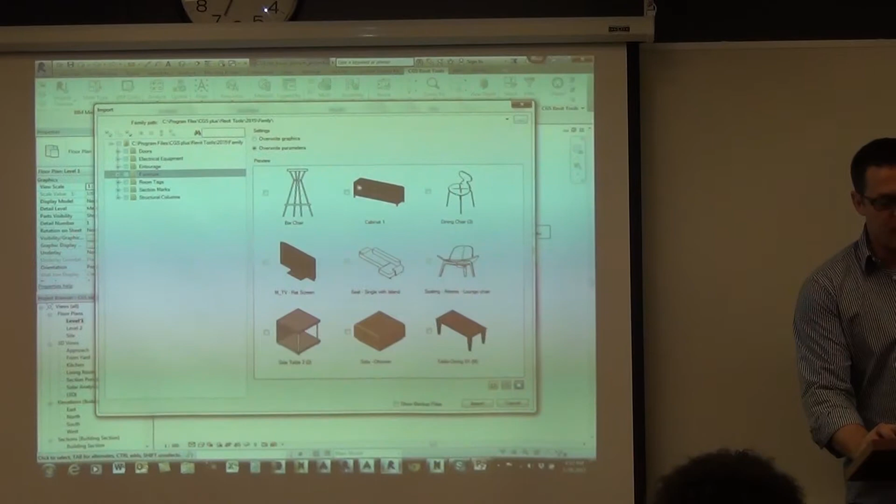I'll show a couple little things in here since I'm running out of time. We've got exporting out families, so you can export things you currently have in your model out to a certain location, and you can also turn around and import those back in. Not a lot to it. Project cleanup - these are pretty popular right now, some big cleanup tools in here, cleaning up views, line types, dimensions, and all that kind of stuff.

We also have a multi-type editor. We were looking at getting rid of that, but I think you like that, don't you? Yeah, so show that - multi-type editor in here. So if I come down to say floors, I might want to grab a few floors and go through and just make a quick change and put it on there, instead of having to go through each individual one. But Jason wants to be able to pick other things, not just floors, or different types of floors.

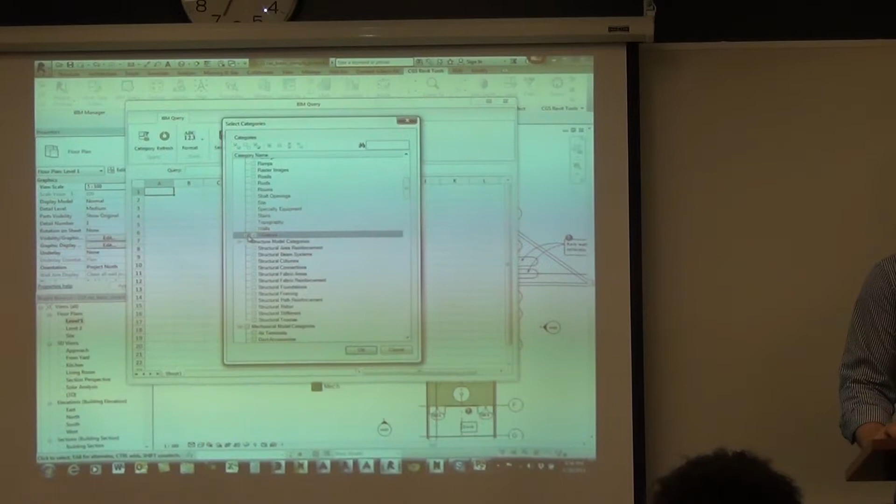Probably the big one here is what's called BIM query - ours is a little different than others out there. They'll be editing your model with an Excel spreadsheet. So for instance, I don't have to take it out to Excel, I can just do it right in here. I can say I want to look at editing all my windows, so I grab my windows. I don't want to see all the properties, just certain ones - I'll go down to materials. I just want to change the material on my windows, and there it comes up with all that data. I can just go in, drop down, I want them all to be steel. Come over here to this one, change that to steel, drop that down, go apply and close, and now I've just changed all my windows so they're steel.

We've got text align tools in here, just different ways to align text. It also does tags, so we can line up things there.

We've got ways to be able to renumber rooms, renumber doors, all this stuff. Legends are probably a really big one for us. A lot of people like our legends.

Basically, I just go in here and create a view. Where's it at? There it is. Create a legend view, and then I go and insert, annotate a component with a legend in here. Doesn't matter what I put in. And now I can just come up to our tools and go legend by category.

What do I want? I'm going to do a horizontal table with floor plan of the furniture, and I want to put all those properties into the legend, and I just go OK.

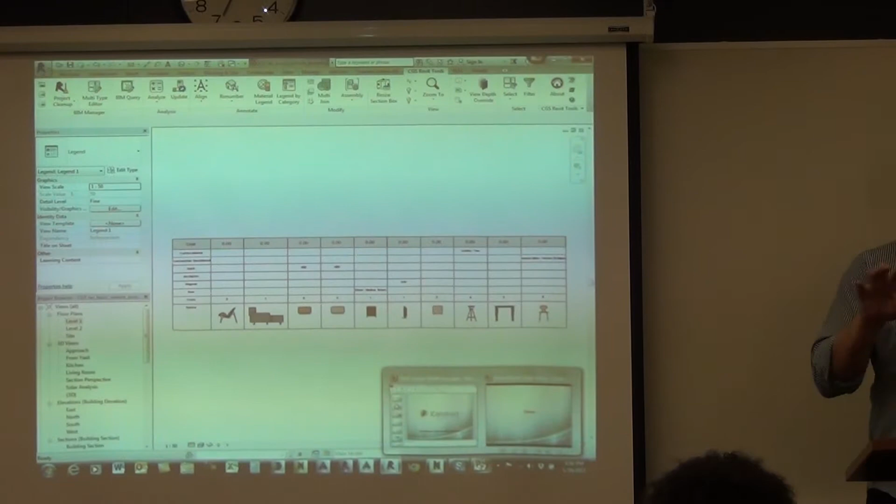We did find out that clients now, you can actually create these in advance, so have it in your template. And so then when you start creating your model, all you have to do is go into that view and just hit that button, and it'll automatically update your table.

Can you do detail components now? I don't know, gotta ask Evo on that.

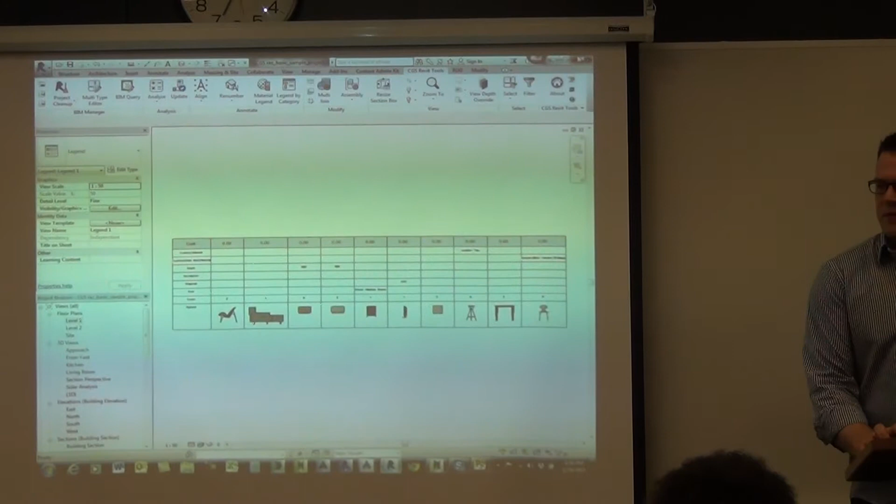We've got multi-join. I'm just pointing out these because I don't want to take up much of your time here. But renaming grids, adding floors to rooms.

We can create assemblies. Basically, what that does is I can select anything and I can create a sheet, and it'll give me the different views that I want.

Ways to turn things on and off. You like the resize box. So here's a 3D model in here. I can come in here to go my resize section box, and I can go in and say, yeah, I just want to zoom to that kitchen and dining or something and apply section box, and then I only go into that. Or maybe I want a few of them in here, and I'll go apply section box.

Does that feature take some setup to do, or is it all extracting from the Revit? All extracted from Revit. That's a good one.

This one here is really just, if I go back in here, just turning things on and off. I don't want to see any doors. I've just turned off the doors and I'm going to turn them back on. I mean, it's not a lot to it. They're not big tools, they're just little things, hopefully make your life a little bit easier.

We've got the filter command. If you ever get a drawing in your Revit model and you can't find the darn thing, it's sitting there floating out there, I just go to filter and you can go in here and you can find anything.

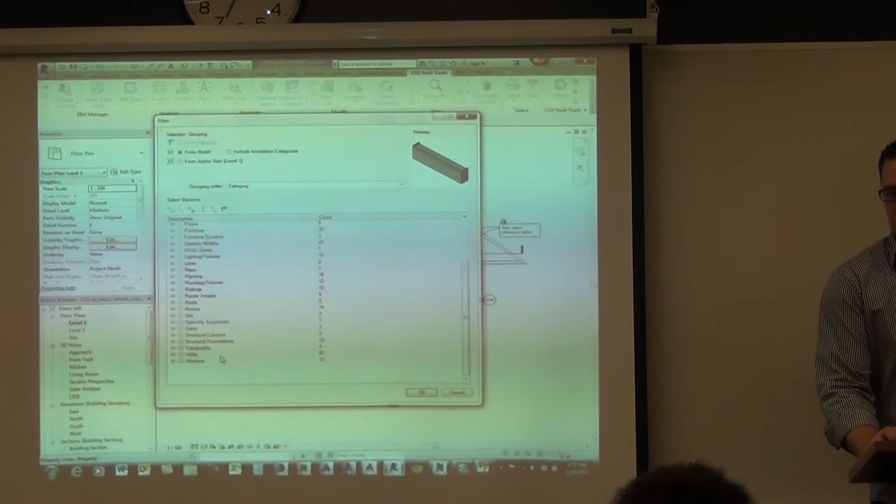Oh, hang on, there's a drawing in this model here. I go, okay, I can't see it, but if I hit delete and go back to my filter, that drawing will now be gone. Okay, so I can select doors or anything.

So we've got a tool in there, view depth override. I don't have the latest one on here, but this is kind of like the architectural desktop thing, where you can actually set different depths for the colors, how it's going to look, and then we've also added the line types. Have you got that one with the line types on it? I don't, I thought I did, but that. And, I mean, there's still more to it.

We've also got what's called a content administration kit, where you've got your shared parameter manager, a parameter manager. I'm not an expert in this stuff. Do you know much about it there, Jason?

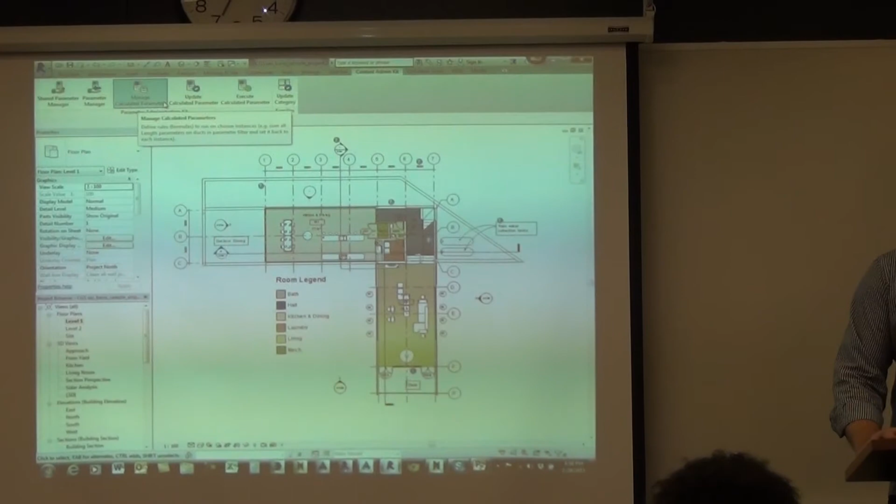The parameter manager was really interesting because we were able to push about 35 shared parameters into the project and pre-assign where they went in about 30 seconds, whereas manually pushing all the shared parameters into the project, setting them up, and turning on all the boxes would have taken about an hour, hour and a half. It was really, really fast.

There's a lot more coming. I just saw my lead developer's ribbon yesterday, and he's got a lot more on there than I do, so I know he's working on some stuff that'll be coming out soon. The idea behind our tools is that we try to come out with a new tool every month or every other month.

The cost is a yearly fee - it's a rental thing because you get all the new tools as they come out. If you're ever in the product, just go to the About page and it'll tell you whether you've got the latest version, if there's a new tool available, and you just automatically get it. We try to notify everybody when a new tool is out, though it's something we're working on getting better at.

We're always wanting ideas. I'm going to work with the user group here, and we'll pick somebody from whoever was in this class. If you don't want to participate, I'm not expecting you to buy it. I'm trying to go around the country doing this, hoping people start inviting us to their user groups instead of me having to knock on everybody's door to get invited. Ideally, I want them to say, hey, can we be next on the list? And so we get a tool in there.

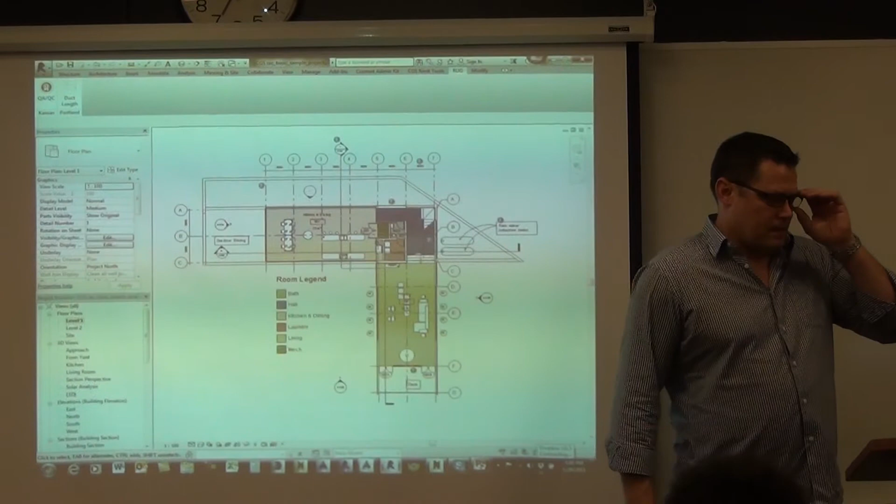Questions? Yes - do you have anything for pushing and pulling data between multiple models? Say I want to change the same property in every single model - I've got 30 models, and I think I'd have to open up all those models. Do we have something for that? He knows, but I'm not a Revit guy. Are they all linked together? No, I'm saying 30 structural models, 30 architectural models for one site.

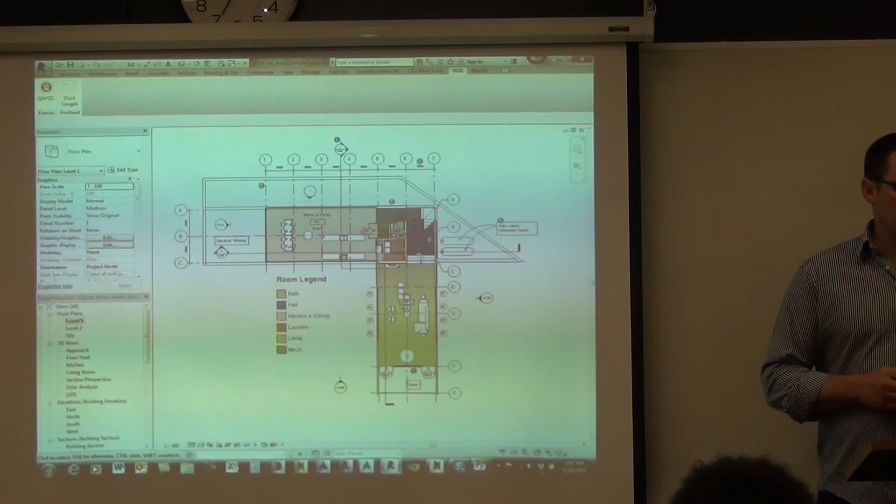I don't think it does that, but you might be able to use the query tool if they were all linked together, potentially. For instance, say I want to just reload a family in all my files - I'd have to open up every single Revit file to reload it. And just push it in? I think he did say there was a way to push a family to multiple files at the same time.

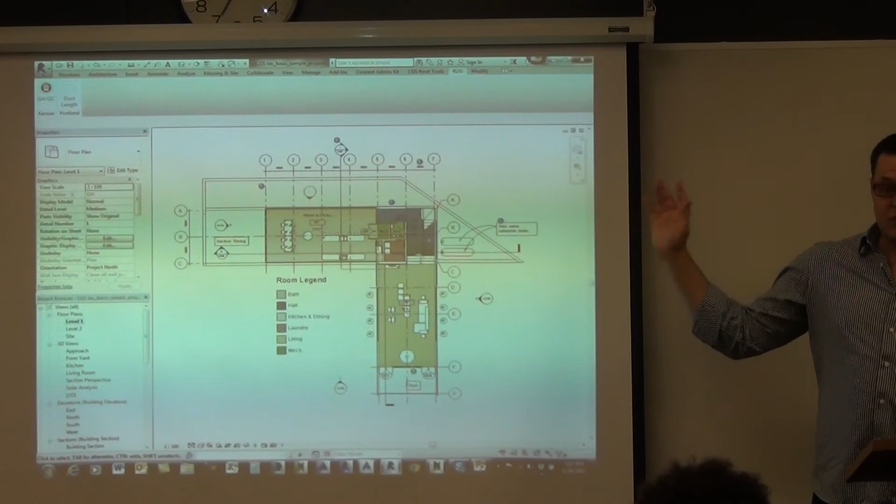The Revit tools, absolutely - the university can have as many copies as you want, and students can have free copies. That's not a problem at all. I own the company, so I can do that. I don't own the other ones, so yeah, definitely drop me an email on that one.